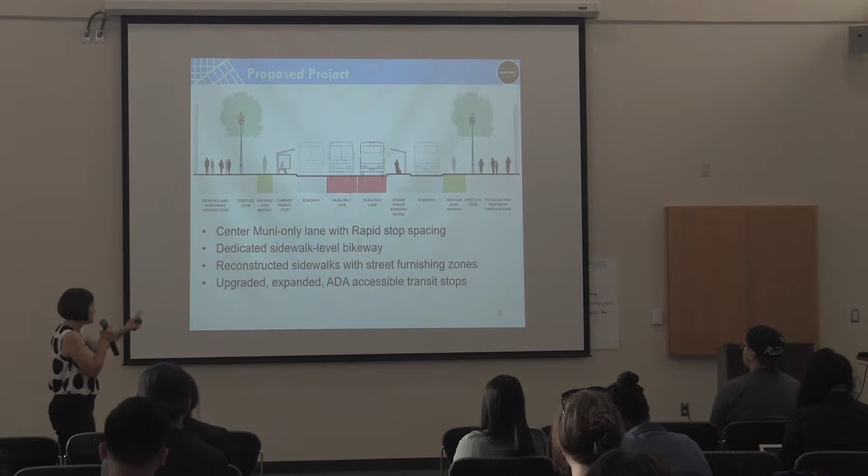So this is our proposed project. Market Street right now is 2 lanes in each direction, and we're not changing that, we're leaving 2 lanes. But the center lanes are going to be Muni only - that means city, municipal railway buses only, and the F line. Any other transit agency, Amtrak uses Market Street, AC Transit uses Market Street - they'll be in the curb lane, in this roadway here. It's labeled roadway.

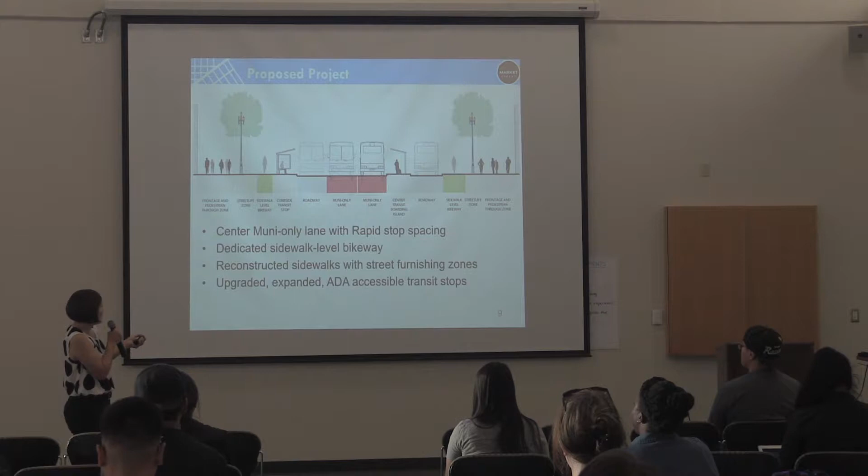Taxis will be in that lane, delivery vehicles, and paratransit. Emergency vehicles can use any lane. I talked about the center boarding islands - here's a center boarding island that goes between the lanes. We're widening them to 9 feet, and then we're also making them long enough that they can fit 2 or 3 buses in a row, one behind the other.

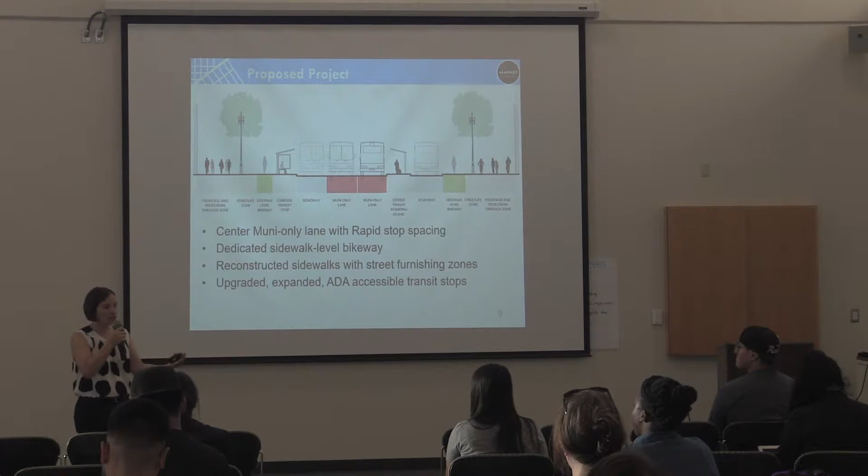One of the biggest changes, though, is that we're providing or building a sidewalk level bikeway. I mentioned bikes right now for the majority of the corridor are riding in that curb lane, with all the shuttle buses and transit vehicles and delivery vehicles. We didn't really have the room, the right of way, to provide a separation or a buffer, and so the decision was to make it sidewalk level. Our standard curb height is 6 inches, and just like the sidewalk, we'll designate an area for bicycles. The way we make room for that is we are widening the sidewalk by 2 feet on each side, or narrowing the roadway by 2 feet on each side.

And then we're repurposing the first 12 feet of sidewalk. I have another slide that shows that in more detail. We're providing a furniture zone, or what we're calling a streetlife zone, where we can put all the street furniture, including trees and street lights, but also provide a space for activation or programming. That's another area where we can work with people from the Department of Public Health, our Office of Economic and Workforce Development, or the Mayor's Office, once we have this brand new, beautiful street, to help us program it and activate the space so it doesn't deteriorate or attract illegal activities that we want to curb.

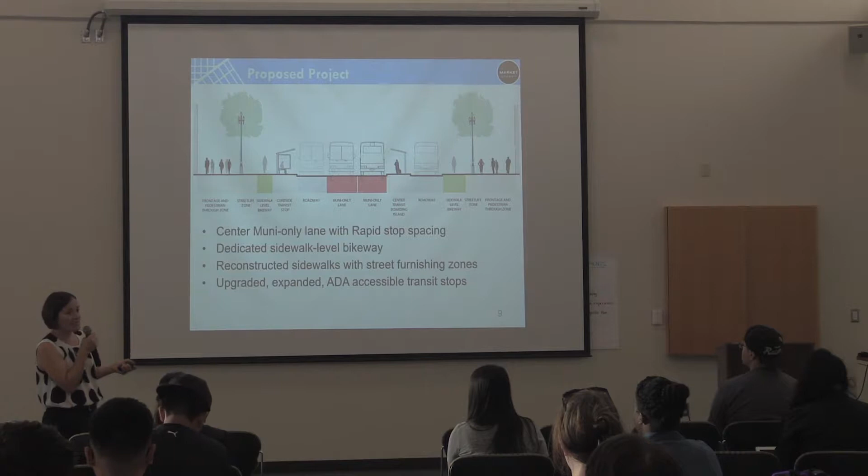And then still leaving the pedestrian walkway on each side, and then a frontage zone next to the buildings, which is for tables and chairs, for restaurants to have tables and chairs out on the sidewalk. I should say the full right-of-way from building face to building face is 120 feet wide. It's one of our widest streets in San Francisco.

That delineator, that bikeway separation, is meant to communicate to people who are blind or low vision that if they cross that strip, they're entering the bikeway. But it's also meant to discourage bicyclists from riding on the sidewalk, so it plays a very important role in the design of our street. Then the furnishing zone varies, I think, between 6 and 9 feet wide. Our pedestrian throughway is typically 10 feet wide, and our frontage zone is 5 to 6 feet.

All right, I'll talk a little bit about the urban design. I talked about how we work with landscape architects. The landscape architects provide our tree selection and determine the size of the tree wells. One of our goals is to have a thriving urban forest, and so this is an important part of our project.

Right now the standard tree on Market is the Platanus, which is a sycamore London plane tree. It hasn't done really well. Some of the trees don't look healthy, some have grown crooked. There's a lot of wind along Market Street, it's a very windy corridor.

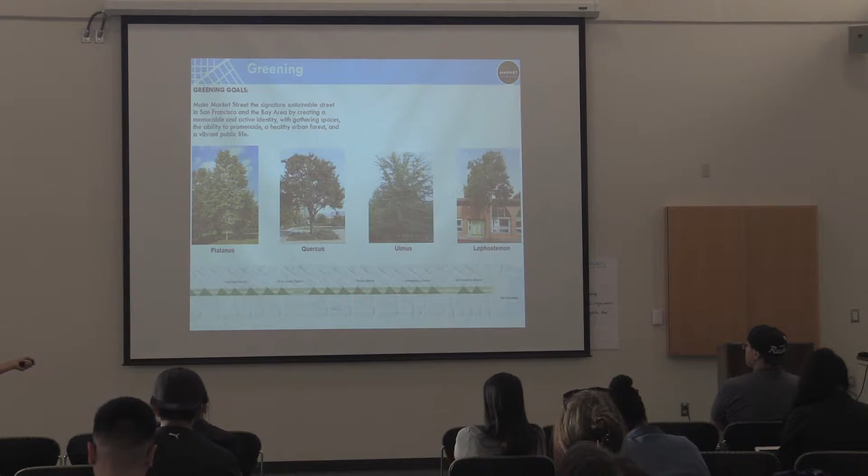So we're looking for a variety of trees that can withstand the wind and help create this thriving urban forest. We're looking at oak trees, elms, and I think this is a Brisbane box. The idea is the London plane tree will be throughout the corridor, and then we'll put these other trees at the intersections or key access points to add variety and help the overall health of the trees.

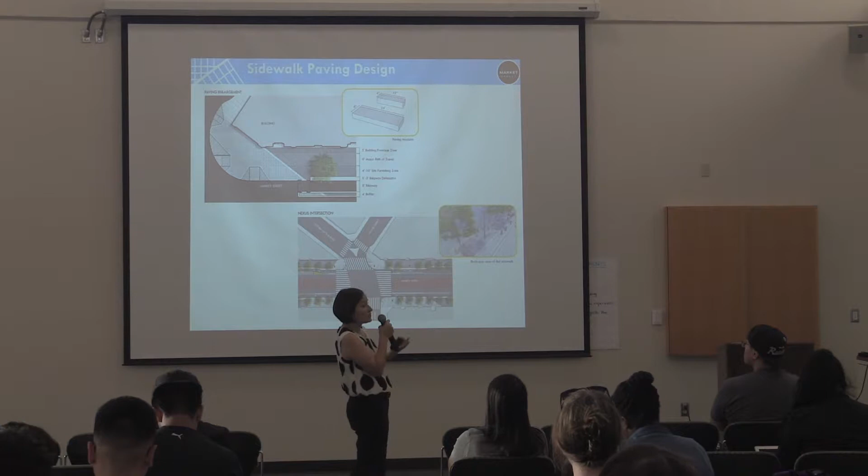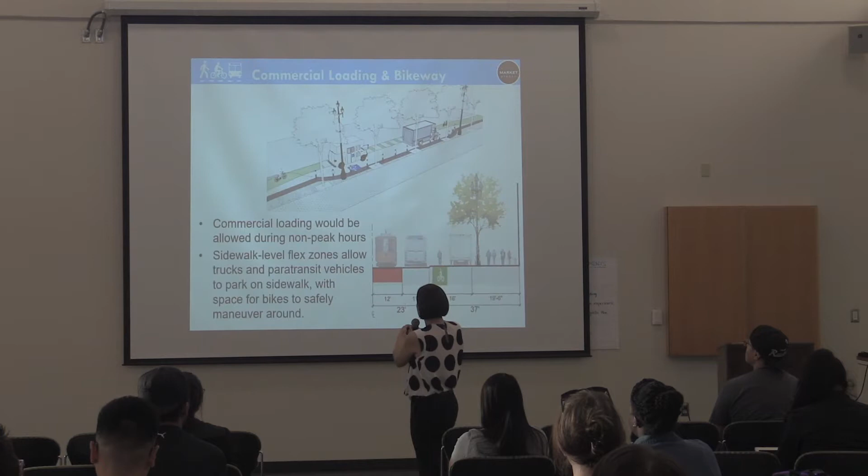Okay, I talked about the brick and how it wasn't accessible. The city now has a standard paving palette that recommends, if you want to use pavers for the sidewalk instead of concrete, using larger pavers in a linear pattern. So in the walkway here, we'll be using pavers that are 8 inches by 24 inches, as opposed to small brick.

And then in the furnishing zone and frontage zone, and I think in the buffer, we're using smaller pavers that are 4 inches by 12 inches. So what this means is you don't have joints as closely spaced together as brick, and without the herringbone pattern, you're spacing out how often people hit a joint. The stacked, aligned pattern also helps guide people along the sidewalk.

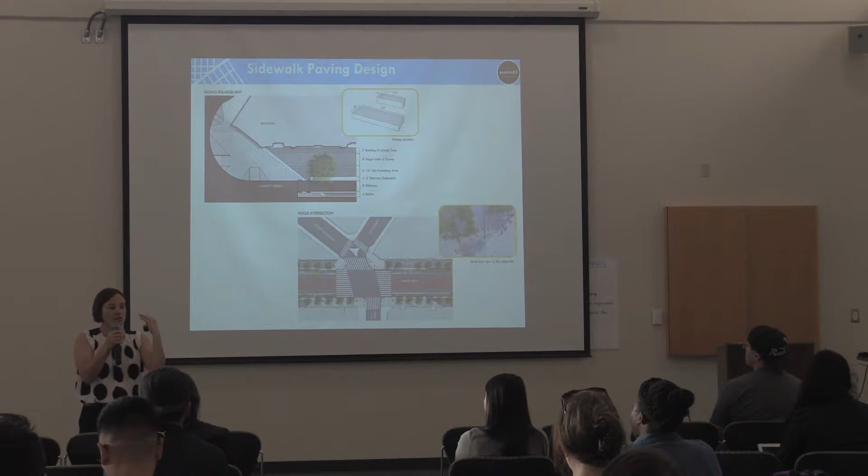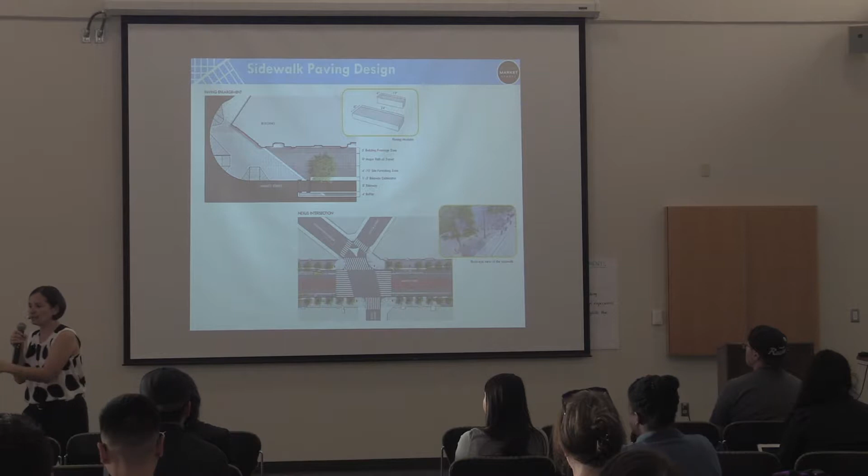We really wanted to distinguish and differentiate among the different zones. We want people to know this is where you walk, this is where you hang out, that's the bikeway—just make it very clear from a design perspective. We talk a lot about universal design: if you come up with a great design that works for everyone, you don't have to worry about accessibility, or about parents with strollers, and no one group stands out. We're trying to have this universal design that everyone can use and is comfortable.

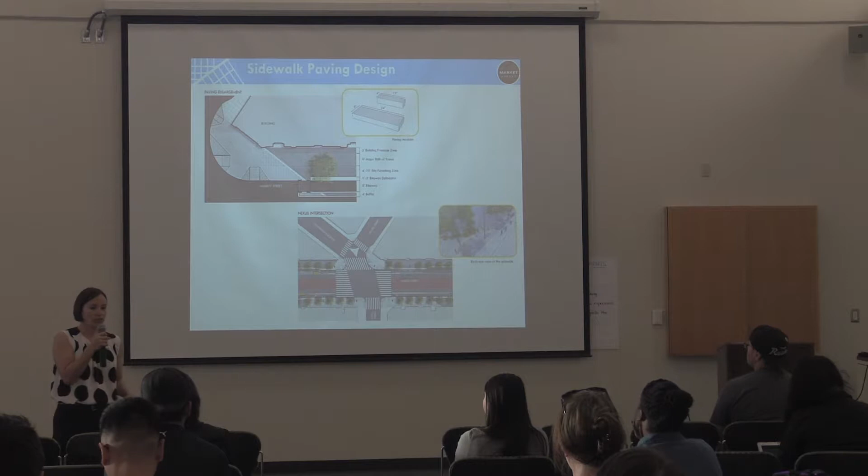We've also spent a lot of time looking at the street furniture, the streetscape elements. We work with BART on this new canopy design. There are 2 locations in San Francisco that have this canopy, but they're going to be on every entrance at BART.

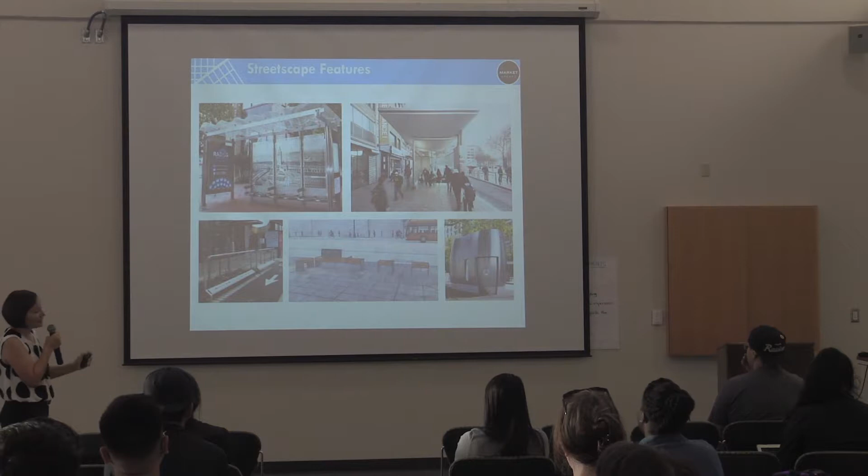Muni stations, so all the entrances at Embarcadero, Montgomery, Powell, Civic Center will have these canopies. Our bus shelters have this seismic wave on top. The whole look or aesthetic we're going for on Market Street, remember it's our preeminent street, we want to make it stand out and facilitate and accentuate all of our parades, protests and events. The finishes are all stainless steel or galvanized steel, and the pavers are all gray.

These are the new toilets. If you've used one of the J.C. Decaux toilets, they're not portable, but they're the public toilets around San Francisco. They look very Parisian and green, more historic looking. They've changed their design to this sleek silver or steel toilet. This is actually the door, it opens up, and there's a self-cleaning toilet inside. Those will start to be installed probably in the next 18 months to 2 years throughout the city.

Seating along Market Street has been removed over the years because people were loitering or hanging out there for too long, and it was people that were less desirable. So all the seating has been removed, and our goal is to bring back some seating to make it aesthetic and comfortable, but not too comfortable that you can stay there for too long. There's quite a balancing act there.

And then these are something new that we're going to try out. They're leaning rails. When you're on your bicycle, if you hit a red light, you can lean either a foot or a hand on the rails and take a break.

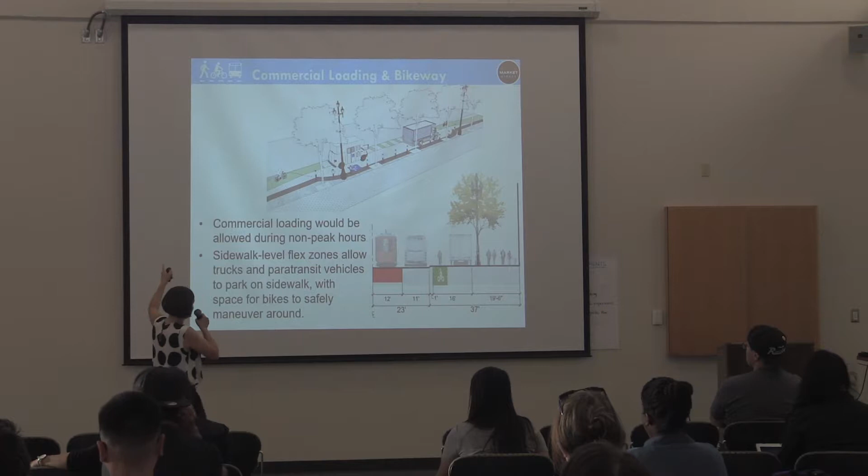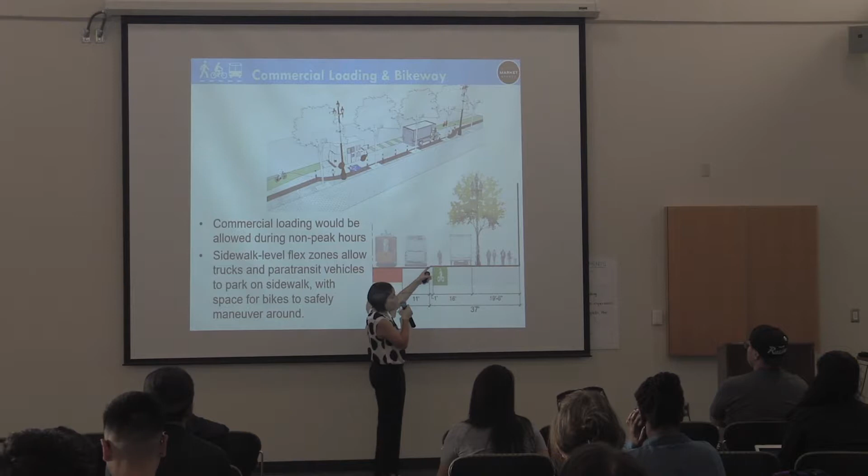Our loading zones are also going to be at sidewalk level. They're sort of like loading bays, which we have now, but the difference is they're at sidewalk level. The bicycle lane, also at sidewalk level, will ride on the outside of the loading zone. So delivery vehicles will be in the curb lane, using this rolled curb to get up and over into the loading zone, and bikes will have to ride around them.

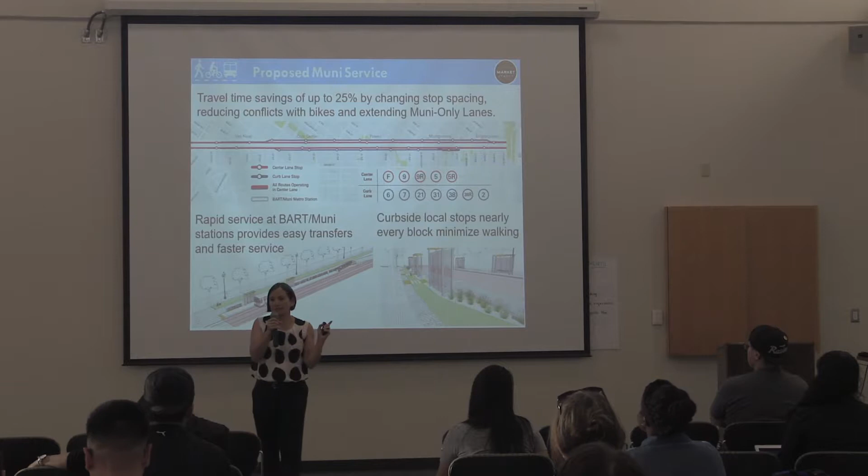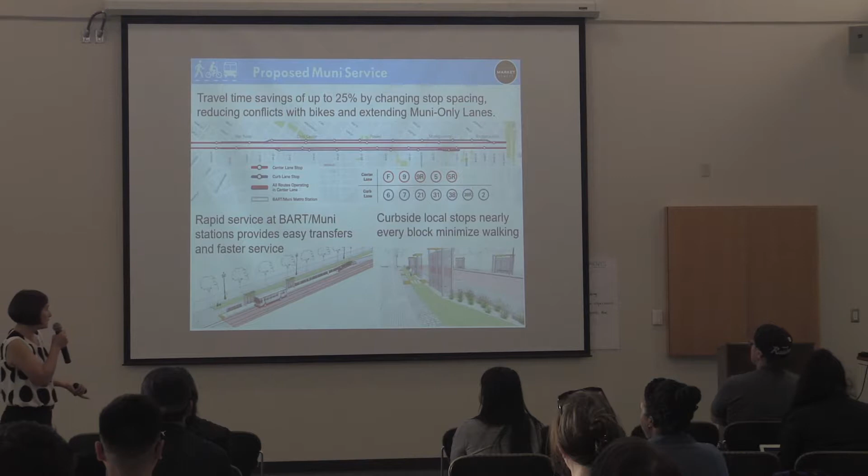I have a couple of slides about the transit improvements, if anyone is really into transit operations. The center lane will be for the F line, our historic streetcar, the 9 and 9R which goes down Potrero into the Mission and Bayview, and the 5 and 5R which runs all the way out to the ocean along Fulton. It will have what we call rapid stop spacing, meaning it stops less frequently, on average about 1,200 to 1,500 feet between stops, so there's less delay and it moves quicker.

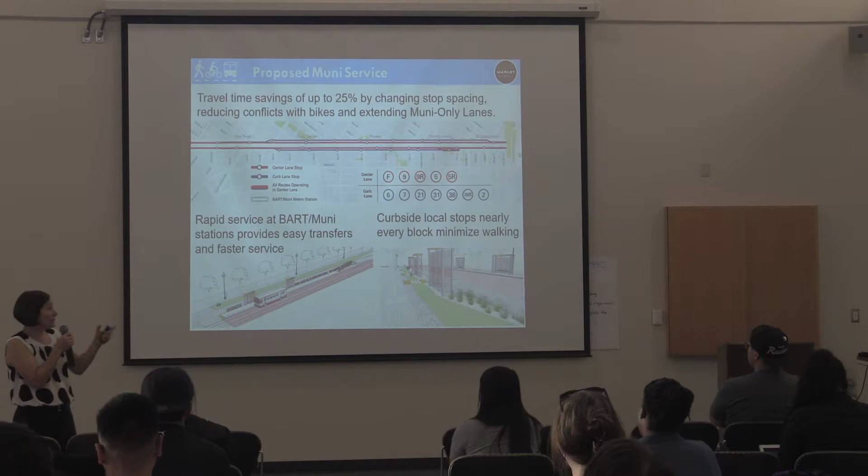Those are our rapid lines, and they will only stop at the BART/Muni stations. Then all the local lines, the 6 and 7 go to Haight, the 21 and 31 go out to Richmond, along with the 38 and 2. Those will all be in the curb lane, and they'll stop much more frequently along the blue line versus the red line in the center.

There's one place where we're adding new track, and that's for the F loop. Along McAllister and Charles J. Brenham, it's new track that the F-line streetcar can use. The F-line streetcar runs from Fisherman's Wharf all the way to the Castro, about over 3 miles end to end, so it's a long, slow route.

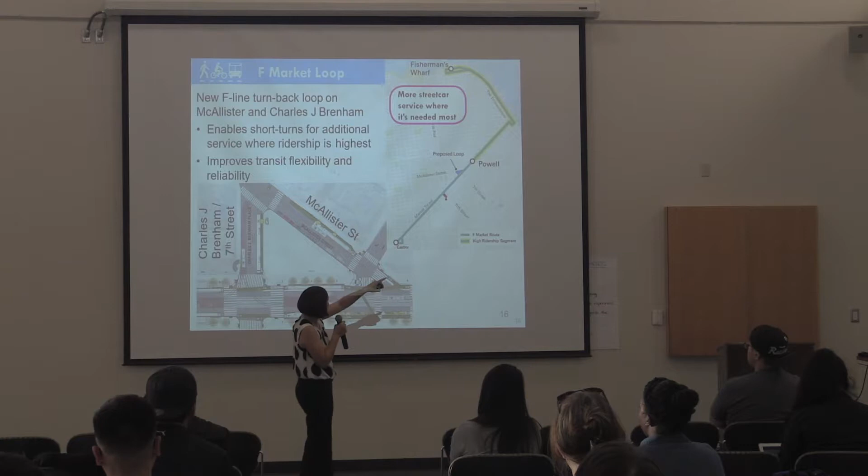The majority of our ridership is along Fisherman's Wharf, the waterfront, all the way to Powell, and then ridership really drops. So we were looking for a place where we could turn the trains around. These are old historic trains, they don't really turn easily, they need to loop around. Some trains you can drive from the front to the back, but most you can only drive from the front. So we needed a place to do a loop, and we're doing it around McAllister and Charles J. Brenham, installing this new track.

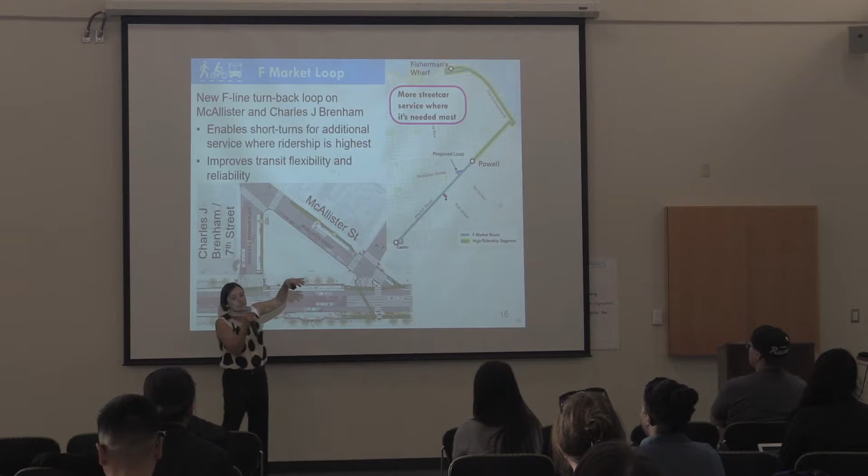We want to do that without decreasing service to the Castro, because it's really popular. So headways right now are every 10 minutes from Fisherman's Wharf to Castro. When we add this loop, we can reduce the time down to 5-minute frequencies from Fisherman's Wharf to the loop. So every other car will turn around in the loop during peak hours for the F line and head back to service Fisherman's Wharf and the waterfront.

So in 2015, the MTA implemented Safer Market Street, which added turn restrictions between 3rd and 8th Streets. With Better Market Street, we're going to extend those turn restrictions. So you'll still be able to drive across Market Street.

If you're on 9th, you'll still be able to cross Market to take Hayes, or 7th is the other route from the freeway headed north. But you'll no longer be able to turn onto Market Street. So if you're on 9th and want to go down Market, you won't be able to do that, or from 7th. So really this whole area from Steuart to Franklin becomes car-free.

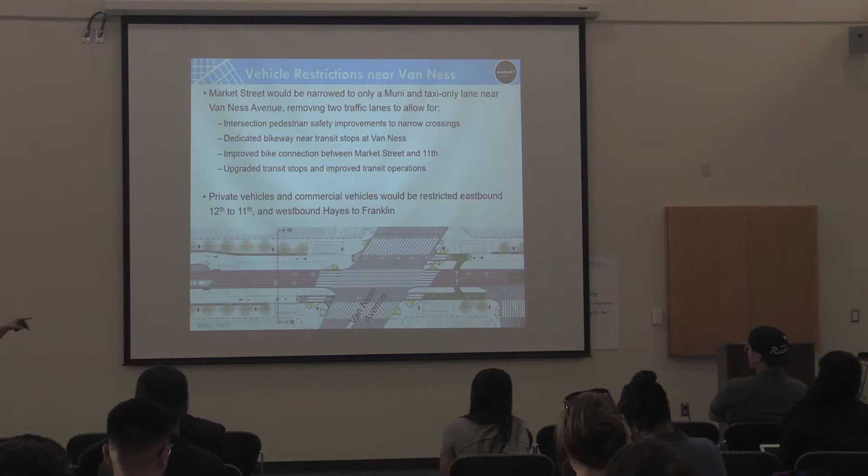So we've been trying to figure out how we're going to maintain access for all these new people while improving safety at the same time. In this area, we're actually narrowing the roadway to one lane in each direction and restricting all right turns at the intersection of Market and Van Ness. There are additional vehicle restrictions too, including not allowing delivery vehicles in this area.

We're now looking at doing a quick build, which is the car-free area, Muni-only lanes, and some painted safety zones. We're going to do a pilot project of the sidewalk level bikeway, and then we'll advertise the first phase of construction in 2020. We'll either break ground at the end of 2020 or early 2021. That's Market Street between 5th and 8th.